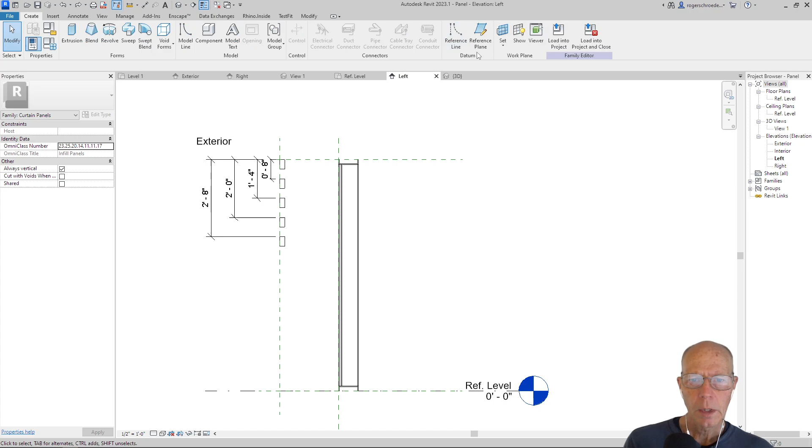I'm going to go to the left view of this. I'm going to add a new reference line, create a reference plane, and let's come over 10 inches, and I'll create that reference plane.

And we're going to make an extrusion here of a spandrel. So I'm going to create it as an extrusion, and I'll use the rectangle tool.

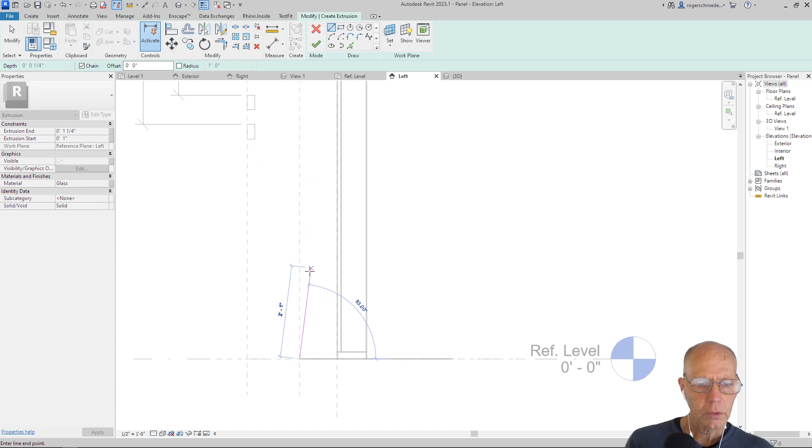And 1'8" sounds like a good distance. I just want to touch the front of this. If I zoom in here, maybe I can catch 1'8". Just me being lazy about not having to resize it. So let's just go ahead and manually do that. I'm going to click this, and I'm going to change this to 1'8".

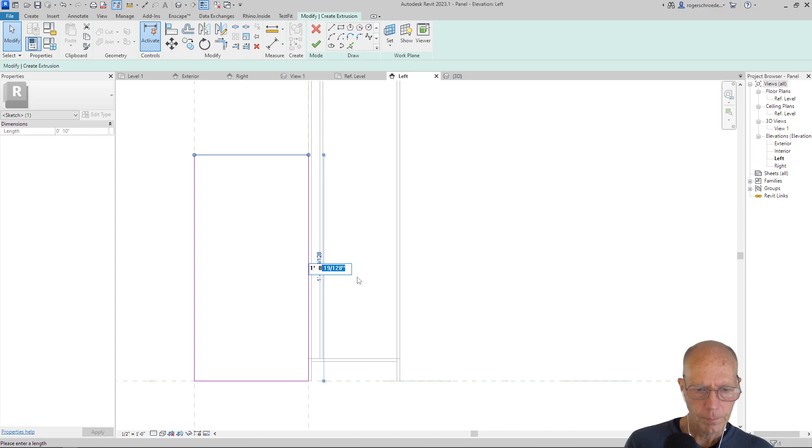And then I want to make sure that we're locking to our reference plane. So I just move that off and move it back on, and I get my indicator. I want to do this to the bottom one again. And I don't know if we can lock off to the face of that. Yes, it looks like we can.

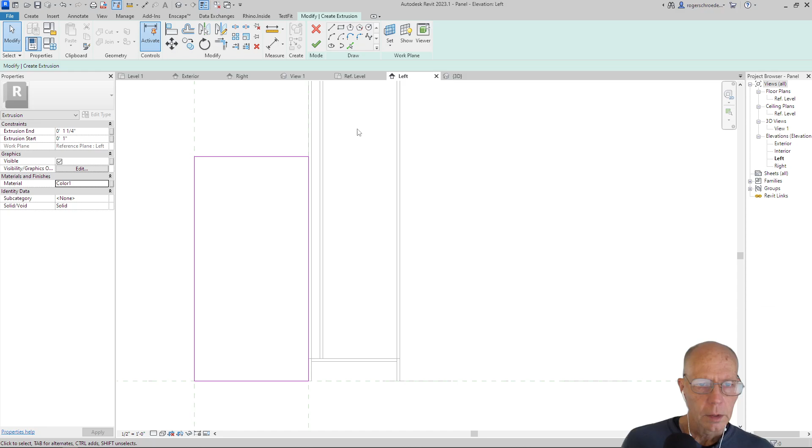So that looks good. We don't want it to have the material glass. We want it to have the material color, Color 1. And we'll click that, and it's going to extrude it.

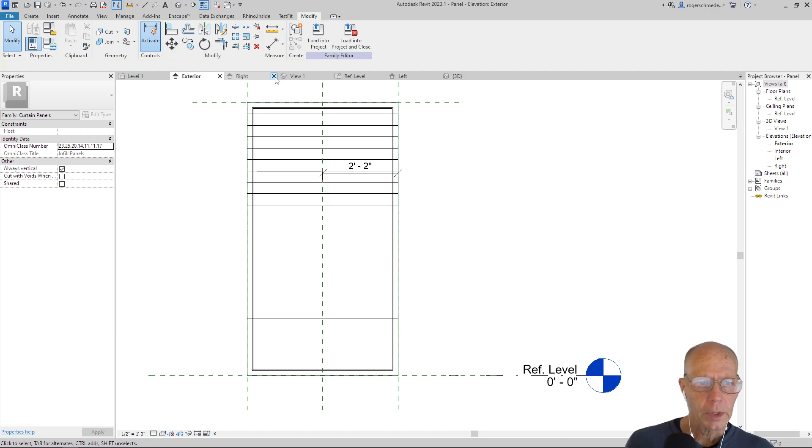And we need to look at that from the exterior. And we'll notice that it's only a tiny little thing because it was left at the glass setting. No problem. We're going to pull this over until it touches this plane, lock it off. Pull this one back until it touches that plane and lock it. And now we can actually exercise it to make sure it's going to behave properly. And it looks like it is.

So now we can go ahead and load that into the project and overwrite our existing version and go to a 3D view. And now we have a spandrel panel. And we can actually more realistically render this.

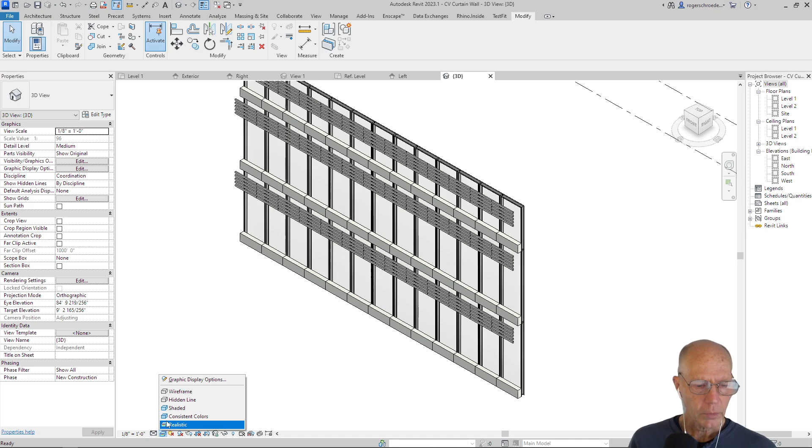Let me change some of these display options. So we'll get rid of the edges. We'll smooth it. Let's add some shadow in now. Let's add some sky.

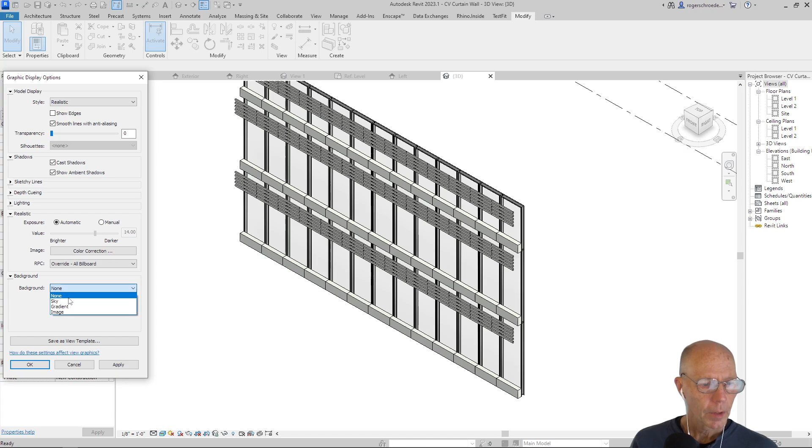We'll apply that. I thought I applied that. It just doesn't seem like it made any difference. Graphic display options. I don't know why that didn't take. Maybe I hit cancel. I'll be more careful. There we go.

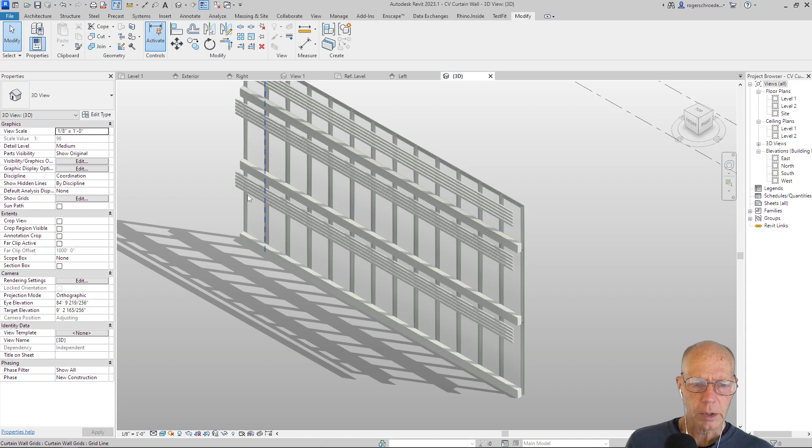And we'll click OK. And so now we have the start of a more sophisticated panel system. So we're going to obviously attach this or make this a little more complex. We're going to make some vertical columns here, and we're going to do that by modifying this unit element that we have here right now. And we'll do that in the next clip.